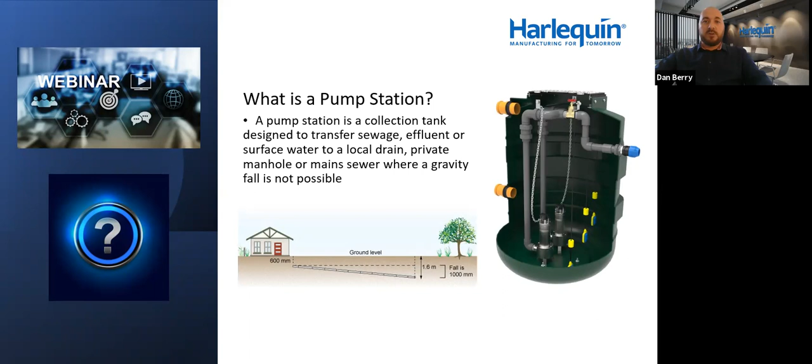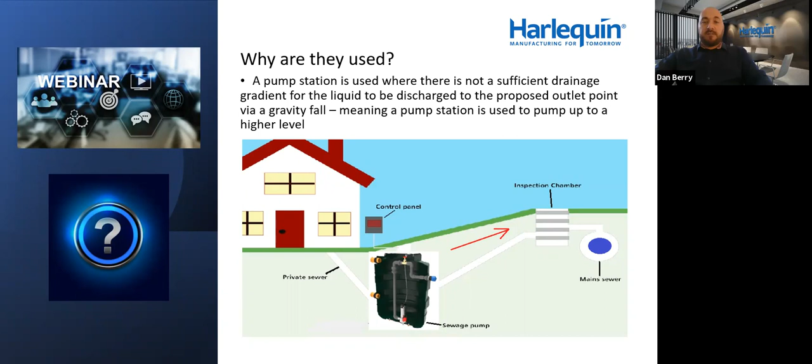What is a pump station? So a pump station is effectively a collection tank designed to transfer sewage, effluent, or surface water to a local drain, private manhole, or mains sewer where a gravity fall is not possible. So why are they used? A pump station is used where there is not a sufficient drainage gradient for the liquid to be discharged to the proposed outlet point via a gravity fall, meaning a pump station is used to pump up to a high level. So effectively, water can't travel uphill, so we would need to use a pump.

How do they work? So the pump sits inside the bottom of the chamber and is controlled by a float switch. When liquid waste enters the chamber, it reaches a certain level and engages that float switch. The pump is then activated. The liquid is then pumped up through an MDPE pipe up to the outlet point. Once the liquid waste has dropped below the float switch threshold level, the pump will then stop. A non-return valve is built into the pump station to ensure that the liquid waste cannot return to the chamber once pumped up to this high level.

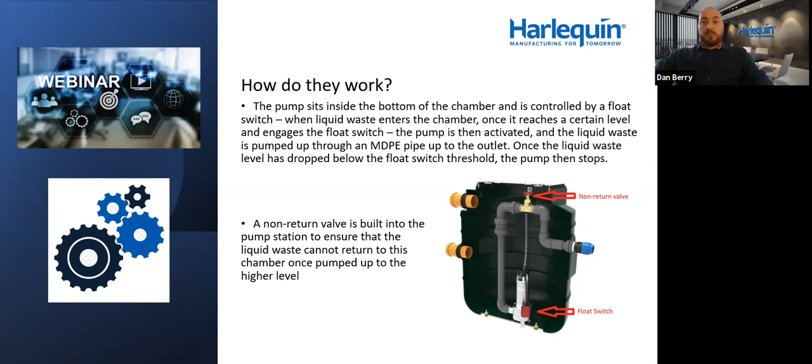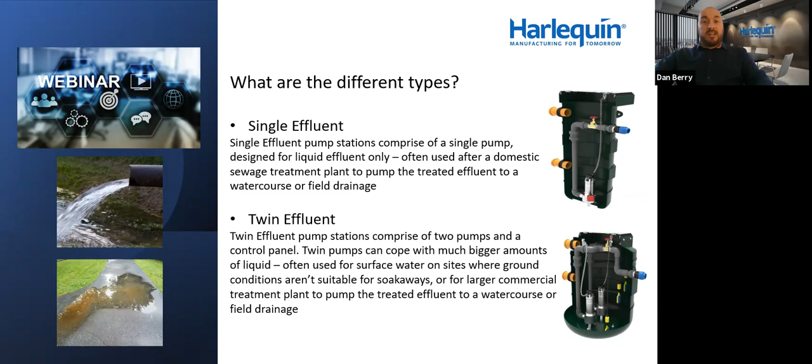What are the different types? So a single effluent pump station comprises of a single effluent pump designed for liquid effluent only. These are often used after a domestic sewage treatment plant to pump the treated effluent to a watercourse or field drainage. Twin effluent pump stations comprise of two pumps and a control panel. Twin pumps can cope with much bigger amounts of liquid. These are often used for surface water on sites where ground conditions aren't suitable for soakaways, or sometimes for larger commercial treatment plant applications where the treated effluent is pumped up to a watercourse or field drainage.

Single sewage pump stations comprise of a single vortex pump. These are designed for solid and liquid waste. They're most commonly used on a single dwelling or an extension to pump sewage to a private manhole cover. Twin sewage pump stations comprise of two vortex pumps, and they would include a control panel with high-level alarm as standard. Twin pumps are more commonly used on larger domestic dwellings or multiple dwellings that are discharged into a main sewer.

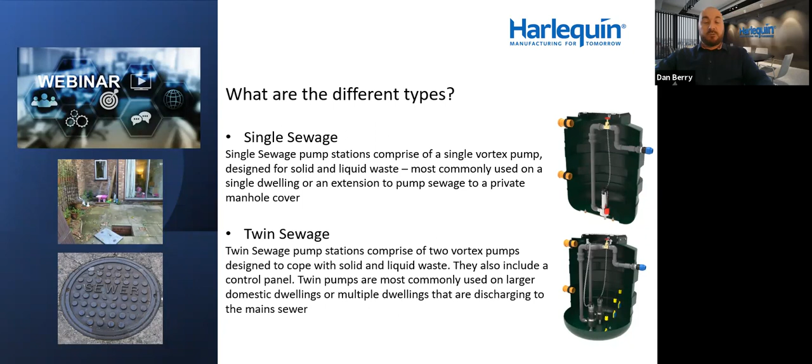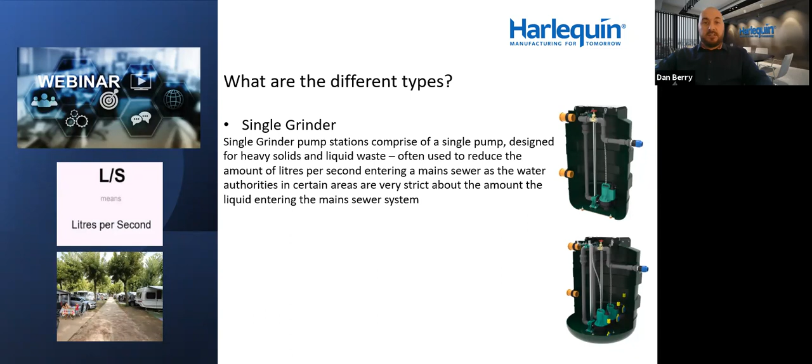Single grinder pump stations comprise of a single grinding pump. These are designed for heavier solids and liquid waste. These are often used to reduce the amount of litres per second entering the main sewer, as certain water authorities can be very strict about the amount of litres per second of liquid entering the main sewer system.

Twin grinder pumps comprise of two pumps and a control panel. They can cope with much bigger amounts of solid matter and liquid waste, often used in a commercial setting, like a campsite where guests tend to flush products and other rogue items that aren't designed to be flushed into the main sewer. Grinder pumps are much less likely to block and can handle these items much better than standard vortex pumps.

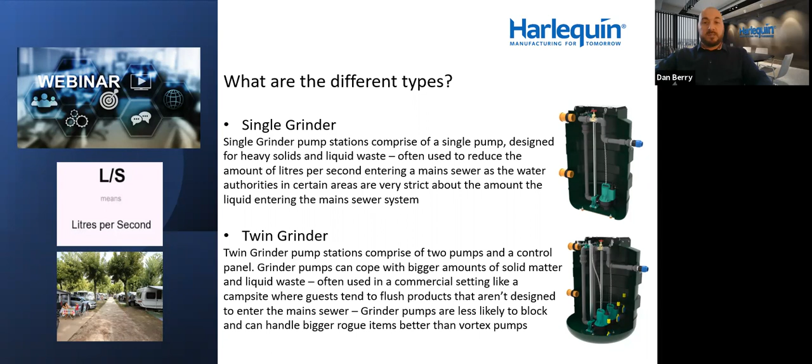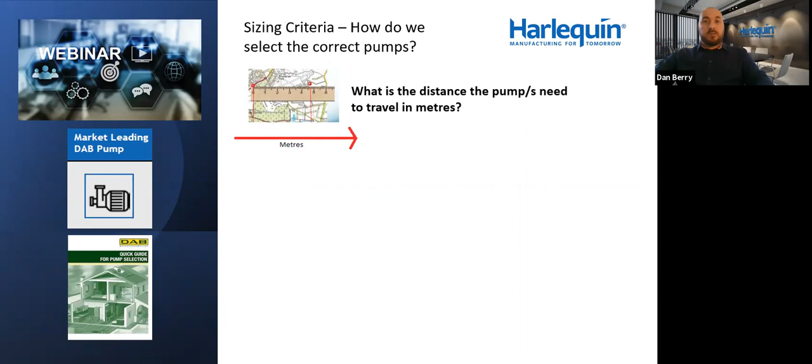So moving on to the sizing criteria, how do we select the correct pumps for the site? The first thing we would need to know is what is the distance the pump needs to travel in meters. The next thing we would need to know is what is the uphill lift in meters. Once the distance and lift have been confirmed, the correct pumps are selected using our pump curve and performance chart.

Pump curve performance charts are available for our full range of pump stations. From the pump curve performance chart, you can also work out the litres per minute or per second, and site-specific curves are available on request.

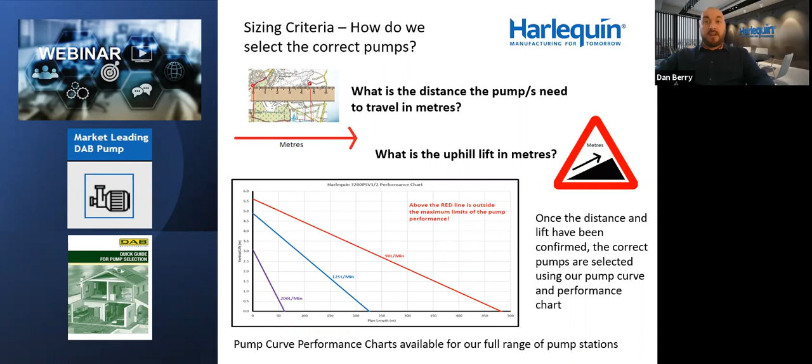So what are the regulations for pump stations? So Part H of the building regulations, Part H1 2.39 states that where foul water drainage from a building is to be pumped, the effluent receiving chamber should be sized to contain 24-hour inflow to allow for disruption in service. The minimum daily discharge of foul drainage should be taken as 150 litres per head per day for domestic use. So in essence, we would allow for 150 litres per person in a domestic setting.

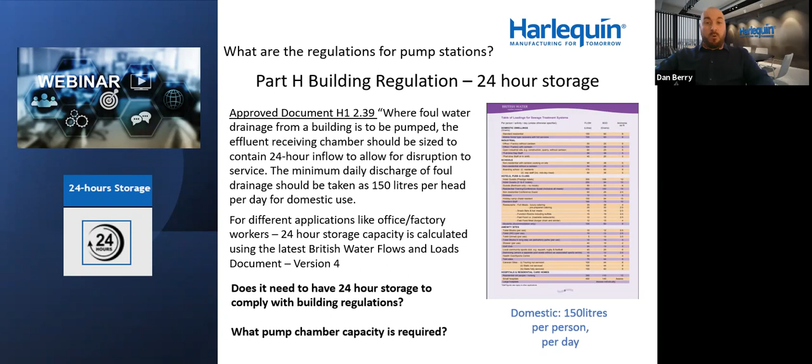Moving on to how pump stations are installed. So the pump stations require a 250 mm base of hardcore or binding sand, which then sits on top of a 150 mm solid concrete base. The pump station is lifted into the hole via the lifting eyes, and the tank should then be filled with water to ensure that it sets in the concrete correctly.

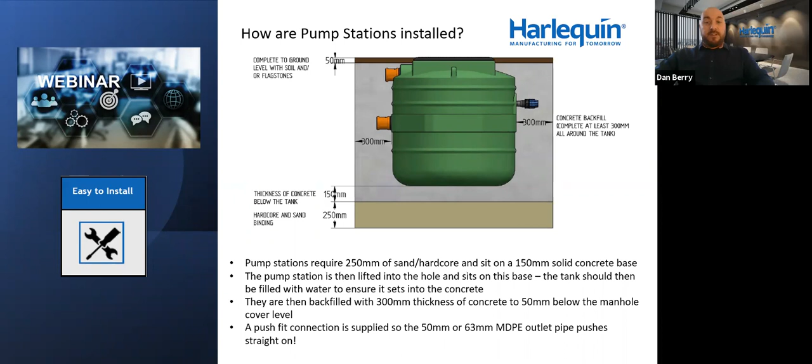They're then backfilled with 300 mm thickness of concrete around the entire outer of the tank to 50 mm below the manhole cover level. We supply a push fit connection for the 50 or 63 mm MDPE outlet pipe, so the pipe will push straight on.

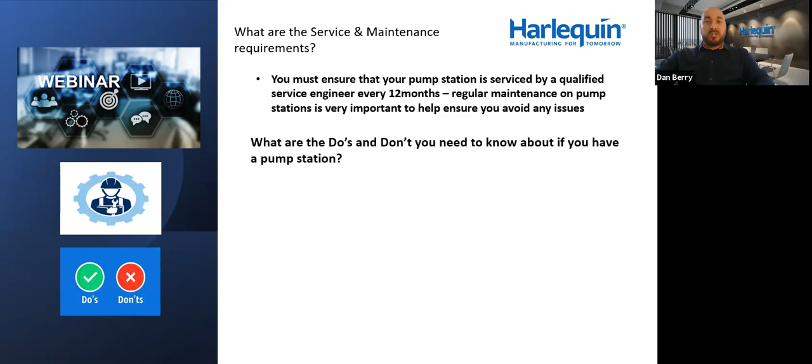So what are the service and maintenance requirements? You must ensure that your pump station is serviced by a qualified service engineer every 12 months. Regular maintenance on pump stations is really important to ensure you avoid any issues. So what are the do's and don'ts that you need to know about if you've got a pump station? Well, the do's. A sewage pump is a solid handling pump that's designed to cope with normal human waste and biodegradable toilet papers only. These are the things that you can flush with no problems at all.

Moving on to the don'ts. So you do not flush anything that is non-biodegradable, as this will block the pump impellers. This includes toilet wipes, baby wipes, any sort of sanitary waste. These must be disposed of elsewhere, as these will cause pump failure.

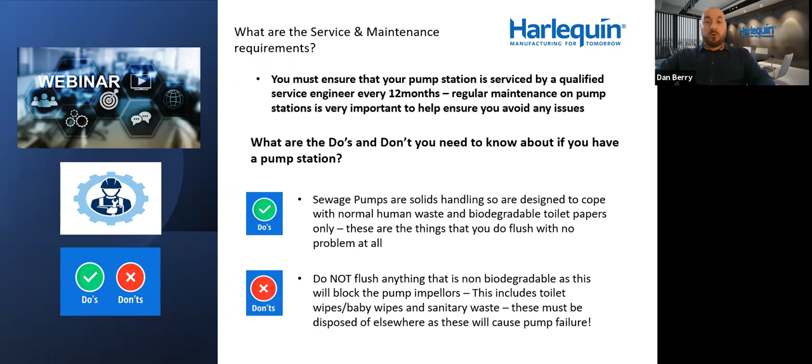So looking at the range of sizes available, Harlequin's range of sizes available include a 450 litre pump station. This would do a small single bed annex or a small extension. An 800 litre pump station, which would do up to 5 people or a 3-bedroom house. An 1100 litre pump station, which would do up to 7 people or a 5-bedroom house. A 1550 litre pump station, which would do up to 10 people or two 3-bedroom houses.

And then we move on to the bigger chamber, which is the 3200 litre chamber, which can do up to 21 people. So that could be multiple dwellings. Bedrooms can sort of range depending on the size of the site.

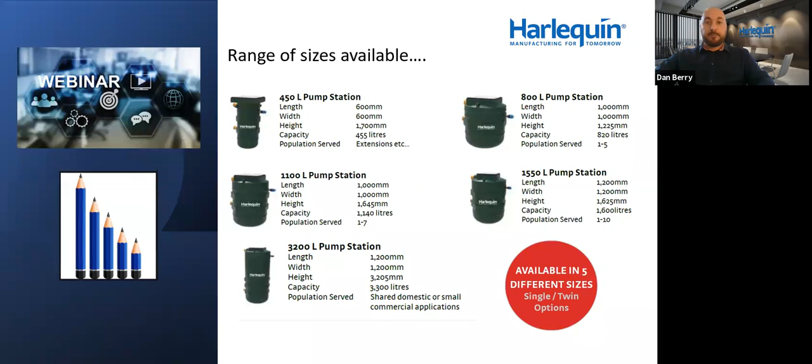What are the features and benefits of our pump stations? So they're suitable for domestic use. 24-hour storage is included in the chamber size as standard. They're a durable and stable, super tough MDPE design. They're very compact. They're easy to install. They're very low maintenance. We use the market-leading DAB pumps. They come with simple pipe work, which includes non-return valves as standard. They also have an extra tough, reinforced flat base for stability.

What are the different types of manufacturing processes? GRP tanks by others are manufactured by hand or a semi-automated process. Anything made by hand is subject to human error and discrepancies. GRP tanks are effectively a skin and do not have any structural stability until they are encased in concrete. The concrete is what actually gives the chamber its strength.

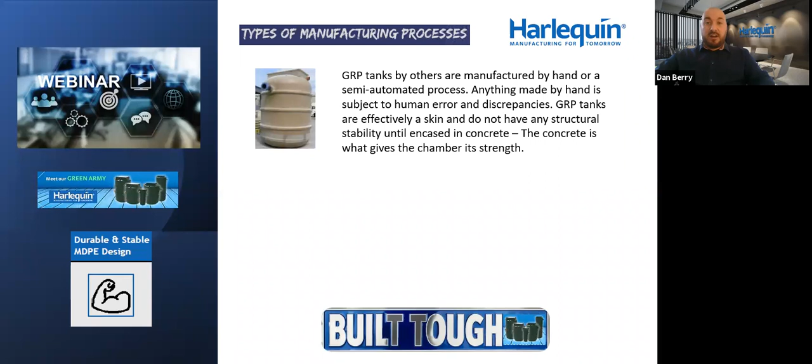So why use a polyethylene pump station? Harlequin's polyethylene tanks are made using our state-of-the-art fully automated manufacturing process. This results in a consistent product thickness throughout the chamber, which is free of defects. This gives a much stronger and durable finish, with the tanks designed to last a minimum of 20+ years.